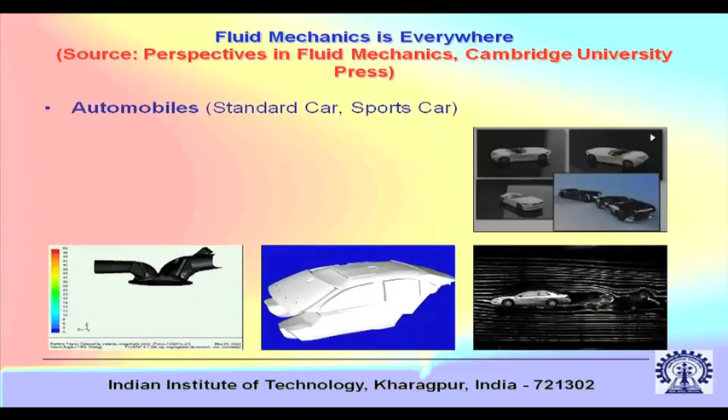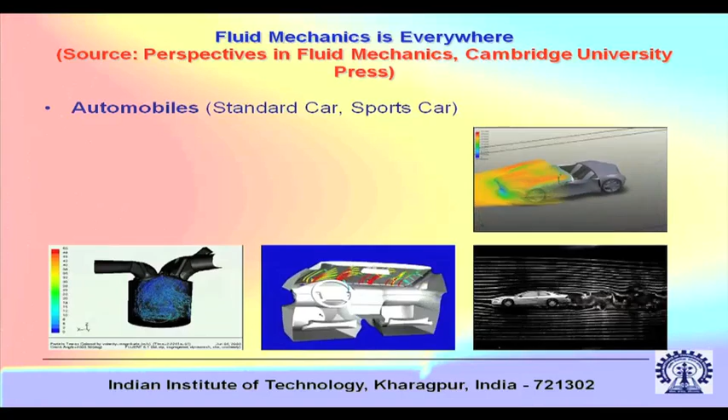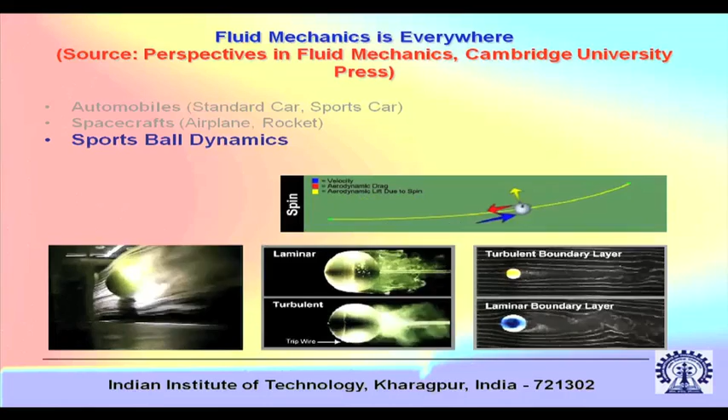As engineers or engineering students, you must have been fascinated by many applications, which I will discuss in more detail in my lectures, like automobiles, standard cars, sports cars, spacecrafts like airplanes, rockets, and sports ball dynamics like the dynamics of tennis balls and cricket balls. All these are broadly in the purview of fluid dynamics.

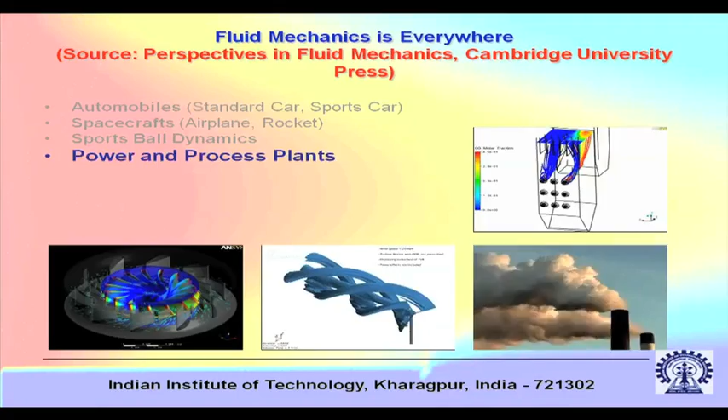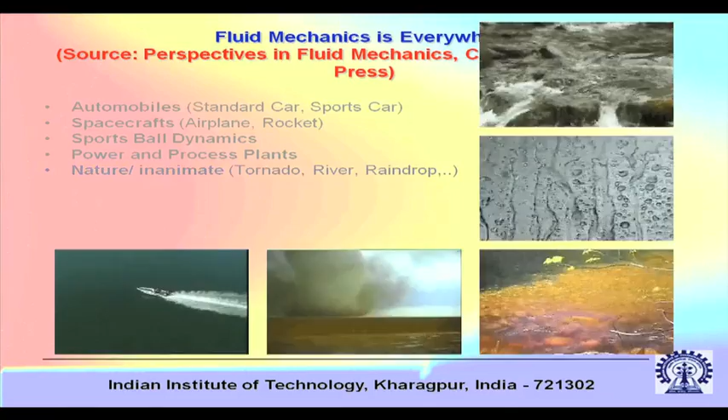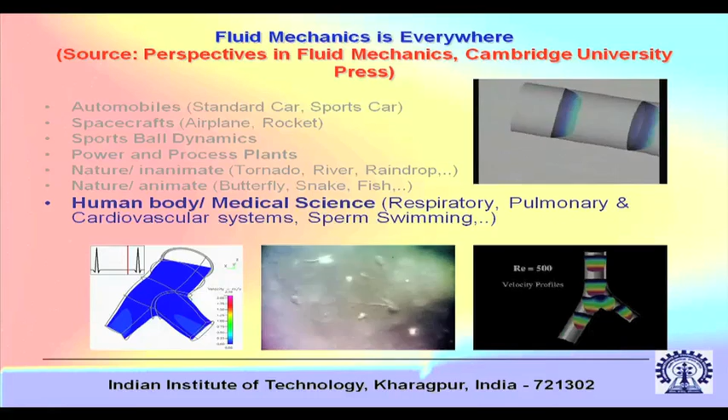Power and process plants, emissions from them, the technologies behind running them, typically all the pipings, fittings, pumps, turbines, and also very interesting natural phenomena like those taking place in tornadoes, rivers, raindrops, and also in animals like butterflies, snakes, and fish, how they swim. Not only in nature but also in the human body, a whole lot of medical science is driven by fluid mechanics, like the respiratory, pulmonary and cardiovascular systems, sperm swimming - all these are governed primarily by the laws of fluid mechanics.

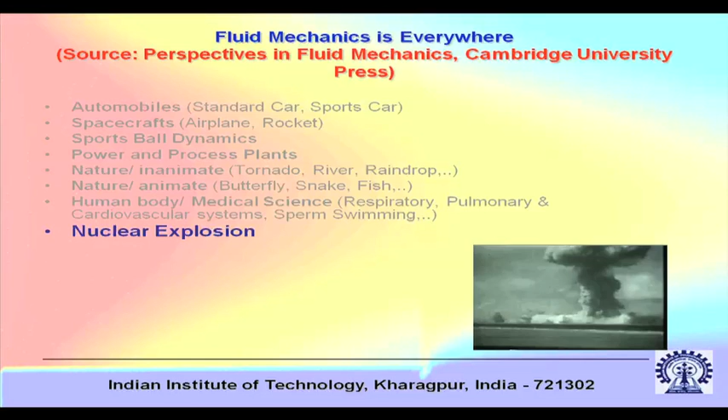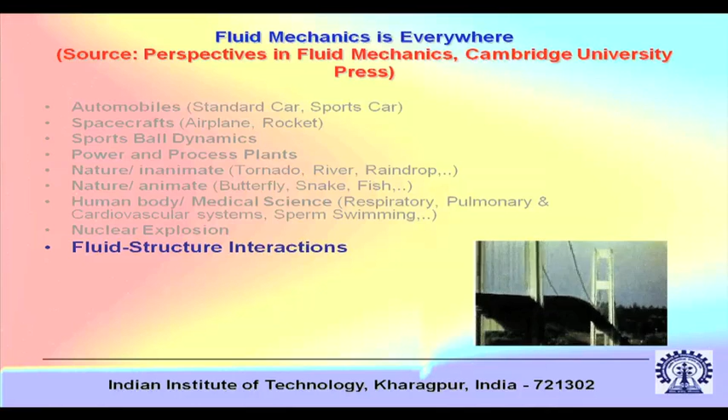And something which is not so peaceful, like nuclear explosion, is also governed by fluid mechanics. So it is not an exaggeration to say that fluid mechanics is related to every facet of life, and not only fluids - you also have interactions of fluids with structures.

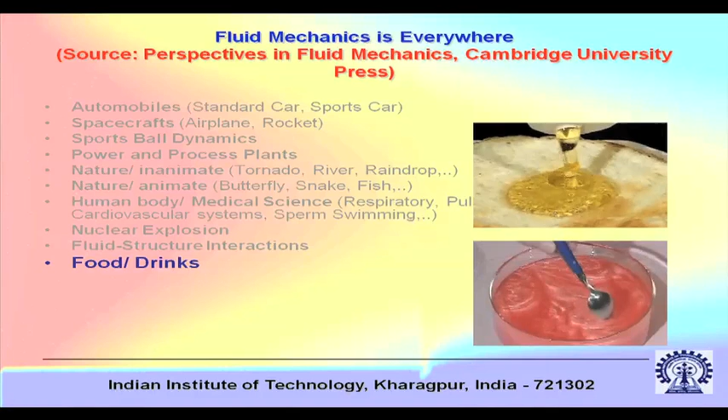So fluid structure interactions are common, and something very interesting is that there are many fluids which are not in the classical sense behaving like water, but like thick fluids, so to say. Sometimes it's very difficult to distinguish between food and drinks, like something soft like a gel type - whether it is a food or a drink is up to you to decide, but these are the kinds of materials discussed in the fluid dynamics paradigm.

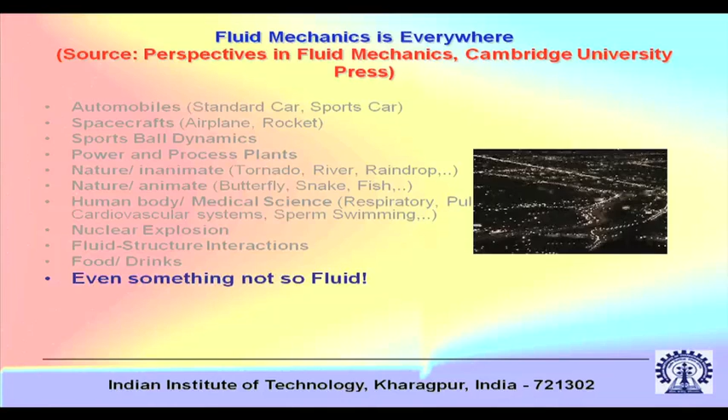And even something which is not so fluid, like this example of traffic flow - this traffic flow is many times governed by the basic laws of fluid dynamics, or fluid dynamics type behavior.

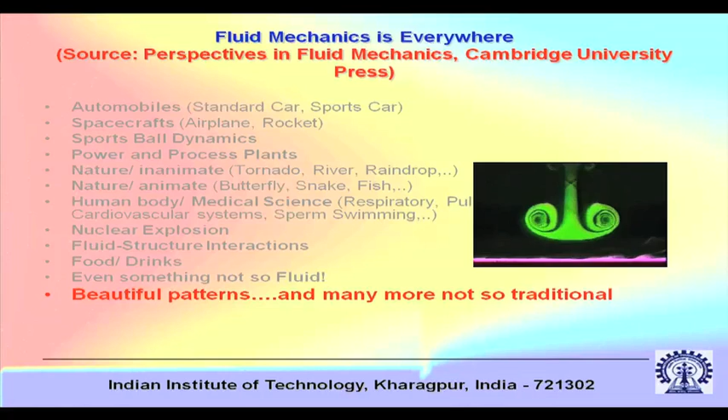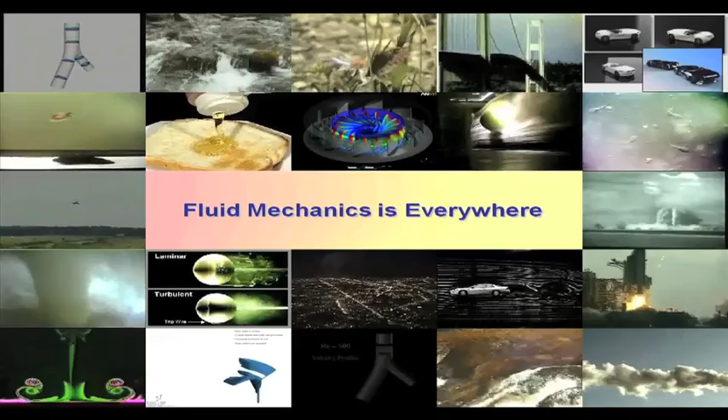Sometimes we study fluid mechanics not just because of the applications, but because of very interesting and beautiful fluid flow patterns associated with the fluid flow, as you can see through these examples, and many more examples which are not so traditional. So we can say broadly that fluid mechanics is everywhere.

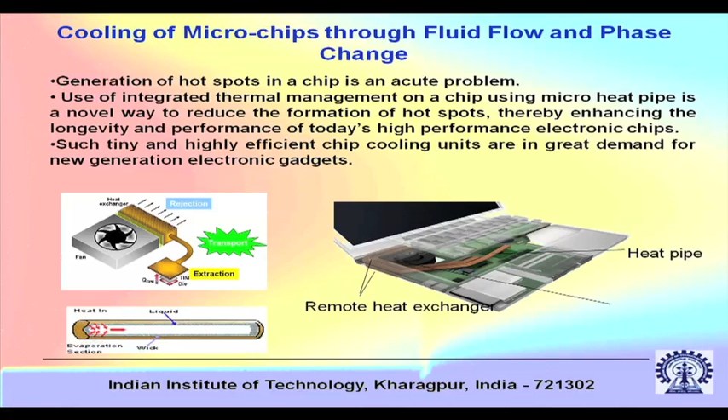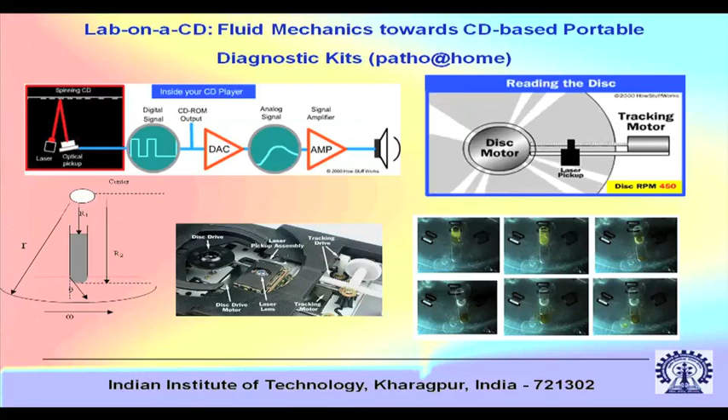It is very difficult to isolate areas where fluid mechanics is not there, and even if we talk about modern examples like micro scale fluid flow, nano scale fluid flow, microfluidics, nanofluidics - which you can use for cooling of microchips, or even with the same technology for medical diagnostics in a portable device, in a rapid diagnostics paradigm - all these examples are broadly classified under the common paradigm of fluid dynamics.

You can refer to many other examples in biology, like rapid DNA hybridization, an example borrowed from the classical biological scenario, and in these kinds of examples also you can see that fluid mechanics works. You can track the dynamics of a biological cell in a fluid flow environment, and you can see that the shear on the cell affects the adaptability of the cell.

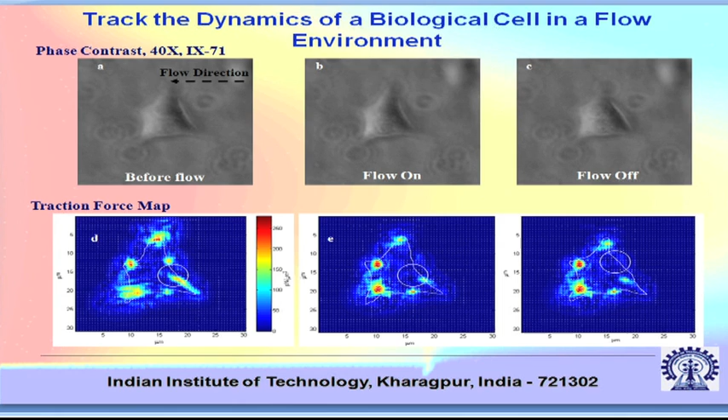Then there are several other examples which can be very interesting and fascinating. For example, by mimicking a mosquito's bite, you can design a microneedle for blood extraction and drug delivery. Now, how does this device work? This device works on the basic principles of fluid dynamics.

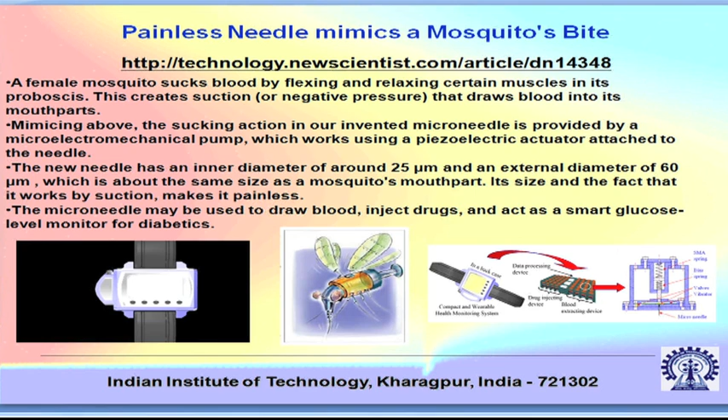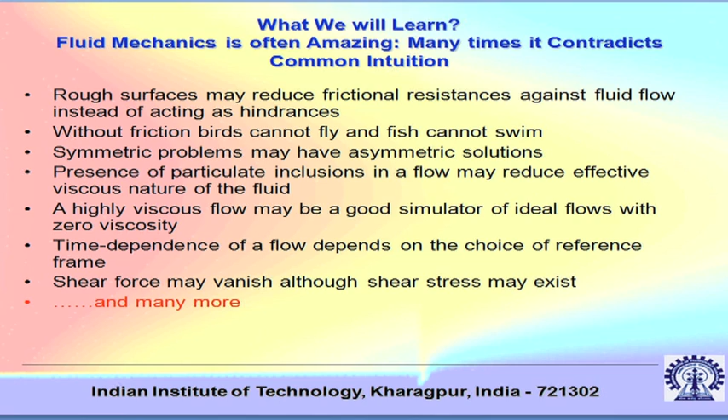So fluid dynamics - it is very important that there is a great level of motivation. We have understood why we will learn fluid dynamics, and I will briefly touch upon what we will learn. We will go through certain protocols to learn the grammar of fluid mechanics, but fluid mechanics is often very amazing - it is beyond the protocols, and many times it contradicts common intuition.

Let us go through these: rough surfaces may reduce frictional resistance instead of acting as a hindrance. Without friction, birds cannot fly and fish cannot swim. Symmetric problems may have asymmetric solutions, and the presence of particles in a flow may reduce the effective viscous nature of the fluid. A highly viscous flow may be a good simulator of ideal flows with zero viscosity, and the time dependence of a flow depends on the choice of reference frame.

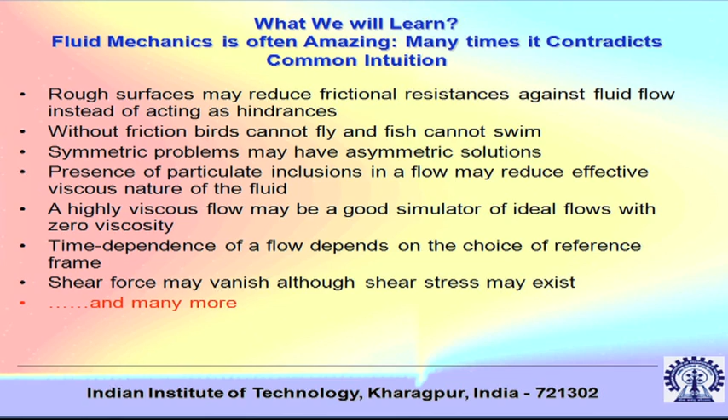Not only that, there are many other non-intuitive examples, like shear force may vanish although shear stress may exist. Many of these examples are very amazing, and they contradict our common intuition - learning science is about learning those examples which contradict our basic intuition.

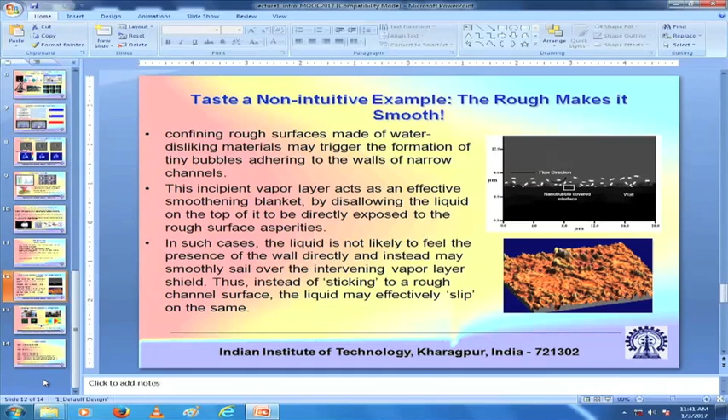So this will be the purview of the basic fluid dynamics course that we will be offering this semester, and if things go all right, in the subsequent semester we will be having an advanced version of the fluid mechanics course, covering more advanced topics as a continuation of these lectures. I hope you will be enjoying these lectures, and we will try our best to satisfy your interest.